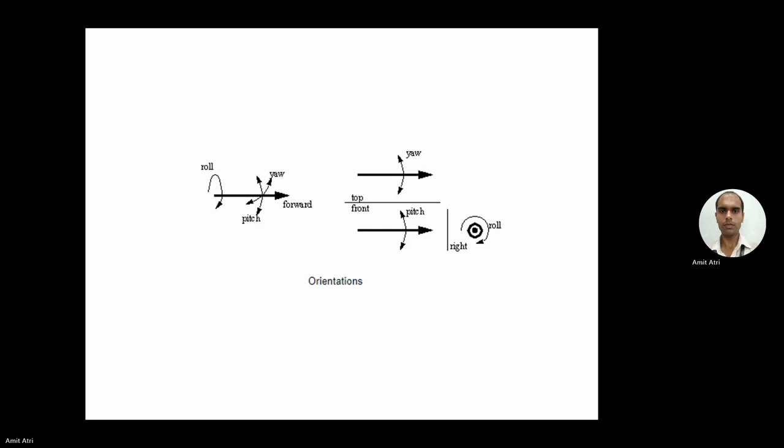Then, looking at the figure below, it will be obvious that the tool can be positioned at any orientation in space. Imagine sitting in a plane. If the plane rolls, you will turn upside down; the pitch changes for takeoff and landing; and when flying in a crosswind, the plane will yaw.

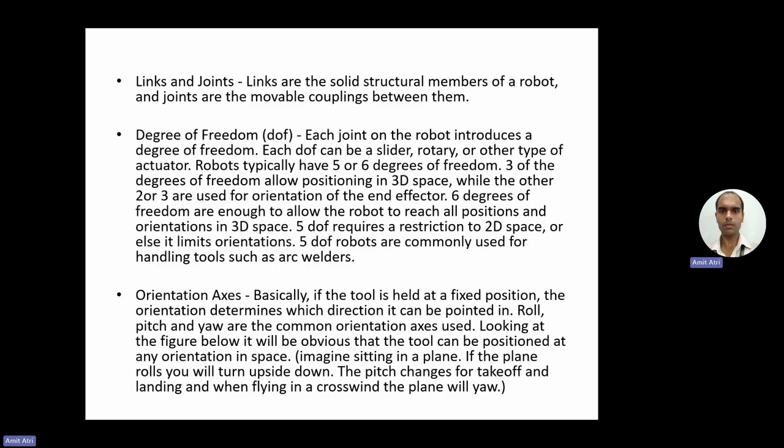Next is the position axis. Regardless of the orientation, the tool, or basically the end point of the robot, can be moved to a number of positions in space. Various robot geometries are suited to different work geometries. We will see the workspace in our coming slide.

Next is the tool center point. The tool center point is located either on the robot or the tool. Typically the tool center point is used when referring to the robot's position as well as the focal point of the tool. The tool center point could be the tip of a welding torch.

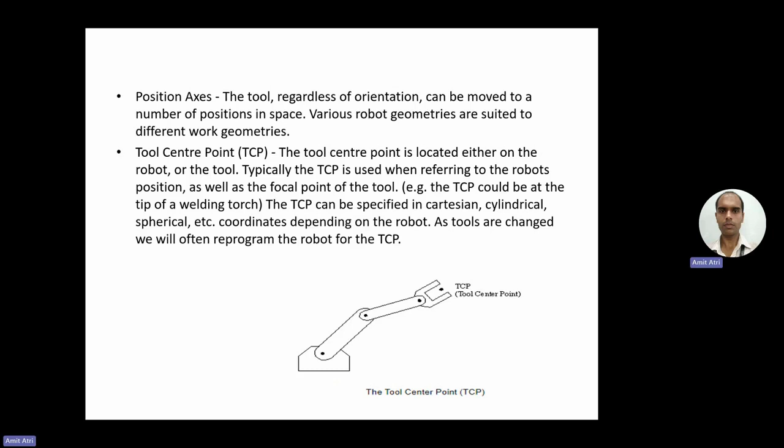The TCP can be specified in Cartesian, cylindrical, or spherical coordinates, the different types of coordinates. As tools are changed, we will often reprogram the robot for the tool center point. A different tool means a different tool center point, so we need to reprogram.

This diagram shows the workspace or envelope where the robot can perform some desired task. The robot tends to have a fixed and limited geometry. The work envelope is the boundary of positions in space that the robot can reach to work in.

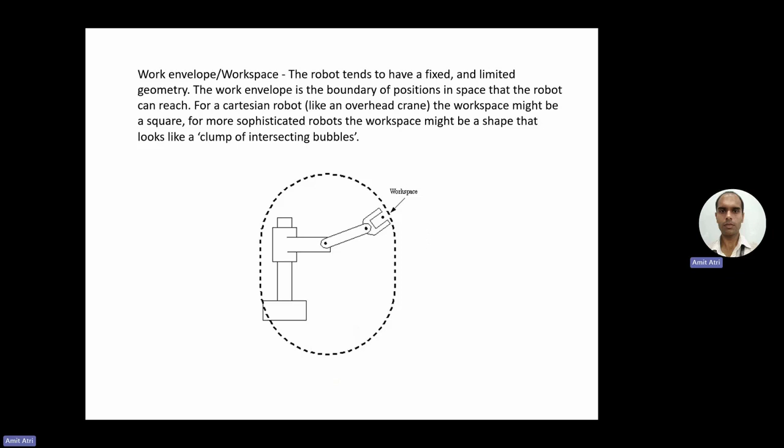For a Cartesian robot, like an overhead crane, the workspace might be a square, because up and down type movements are more common. And then in some rotation types, forming a square. For more sophisticated robots, the workspace might be a shape that looks like a clump of intersecting bubbles.

Speed. One of the major advantages of the robot is its high speed. Speed refers either to the maximum velocity achievable by the TCP or by the individual joints. This number is not accurate in most robots and will vary over the workspace as the geometry of the robot changes. The number will often reflect the maximum safest speed possible. Some robots allow the maximum rated speed to be passed, but it should be done with great care.

Okay, that means the speed we should monitor. Next is the payload. The payload indicates the maximum mass the robot can lift before either failure of the robot or dramatic loss of accuracy, meaning the loading capability of the robot. It is possible to exceed the maximum payload and still have the robot operate, but this is not usually practiced because the quality or the accuracy may be compromised.

When the robot is accelerating fast, the payload should be less than the maximum mass. So this is affected by the ability to firmly grip the part as well as the robot structure and the actuator. The end of arm tooling should be considered part of the payload.

Then settling time. During a movement, the robot moves fast, but as the robot approaches the final position, it slows down. This we also observe in the programming: between the endpoints the movement is fast, and near the endpoint the movement is slow. The settling time is the time required for the robot to be within a given distance from the final position.

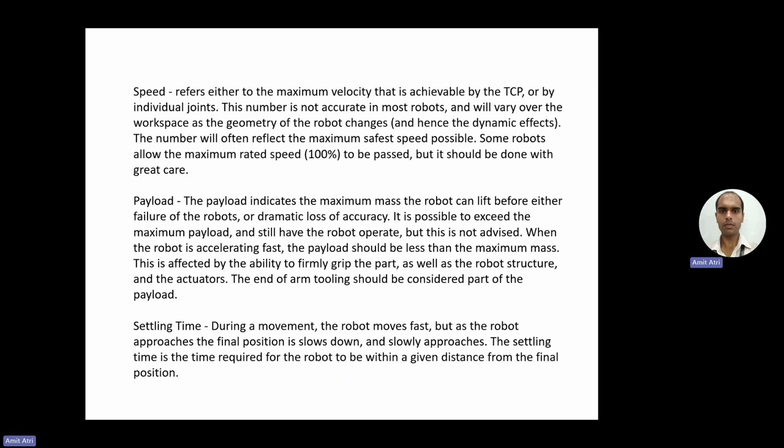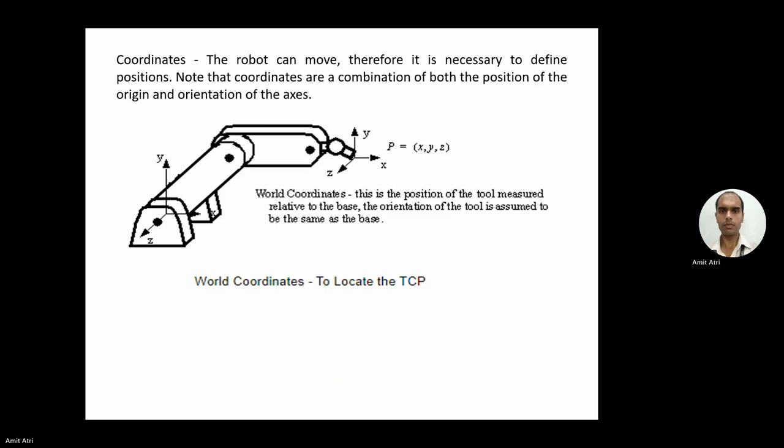Here the coordinates are shown X, Y, Z. Because the robot can move, it is necessary to define from which position it has to move to which position, the initial position and final position. So the coordinates of the joints are shown here in the XYZ domain. Tool coordinates, then joint coordinates, both are there. Tool coordinates consider orientation, and they are measured against the frame attached to the tool. Next is the joint coordinates: the position theta 1, theta 2, theta 3 means how much the joint is moving.

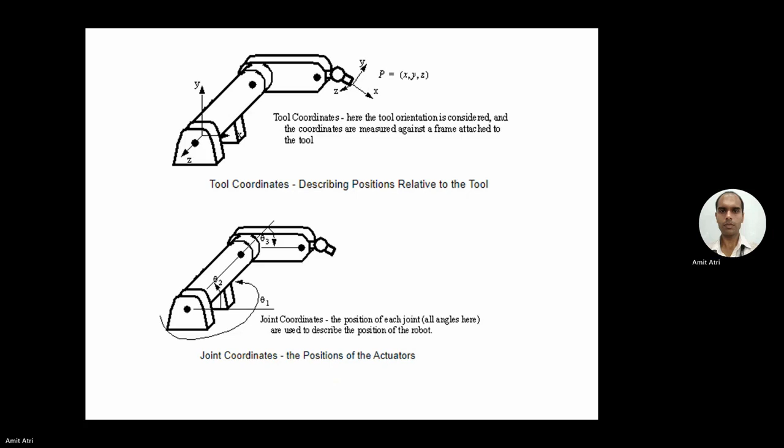So now coming to accuracy and repeatability. First, the resolution and the use of digital systems. Again, other factors mean that only a limited number of positions are available. Thus the input coordinates are often adjusted to the nearest discrete position, because there are limitations in determining the exact location and then assigning the location as a position to the robot.

Then kinematic modeling error. The kinematic model of the robot does not exactly match the robot. As a result, the calculations of required joint angles contain a small error. Next is calibration error. The position determined during calibration may be off slightly. It means the position which we have determined is not the exact position of the object or of the tool, so there is an error. That is a calibration error.

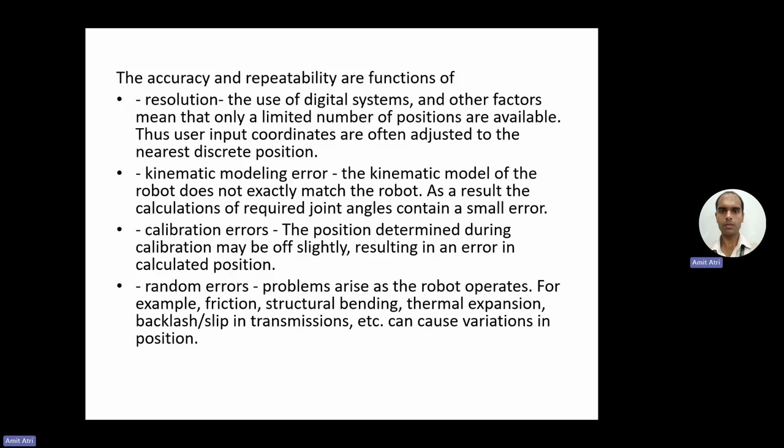Then random errors. They occur due to the operation of the robot. Some examples are friction, structural bending, thermal expansion, backlash. Then accuracy. Accuracy determines how close the robot gets to the desired point. This measures the distance between the specified position and the actual position of the robot end effector. Accuracy is more important when performing offline programming because absolute coordinates are used.

Next is repeatability. This is how close the robot comes to one position again. Once it has moved to a position, it has to come back to the same position. Repeatability means it will come back to the same position any number of times, otherwise there could be some deviation. It moved from point A to point B, then it is coming back to point A. If repeatability is high, it will come exactly to point A. If repeatability is low, it will not come exactly to point A; it will come near point A.

This will go on increasing because it has to perform the same task a number of times. So repeatability is a measure of the error or variability when repeatedly reaching for a single position. This is the result of random errors only. Repeatability is often smaller than accuracy.

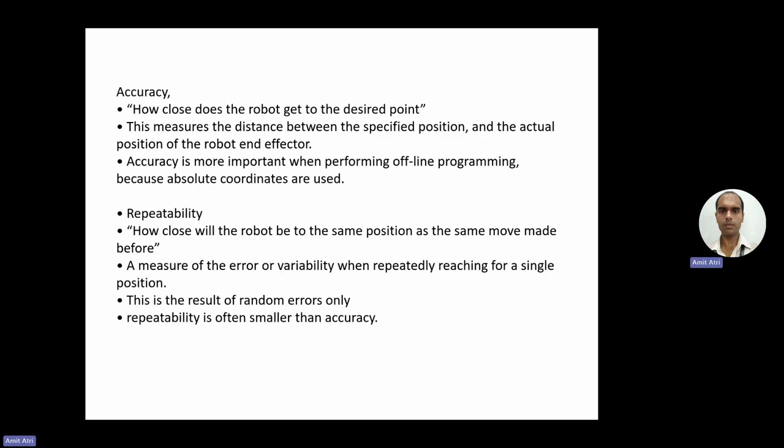Next is control resolution: spatial resolution and control resolution. Spatial resolution is the smallest increment of movement into which the robot can divide its work volume, the smallest increment in the work volume. It depends on the system control resolution and the robot's mechanical inaccuracy. It's easy to conceptualize these factors in terms of a robot with 1 degree of freedom.

Next is control resolution. It is determined by the robot's position control system and its feedback measurement system. The feedback system, in the basic system we studied, was using the sensor. So position control system and feedback system. It is the controller's ability to divide the total range of movement for a particular joint into individual increments that can be addressed in the controller.

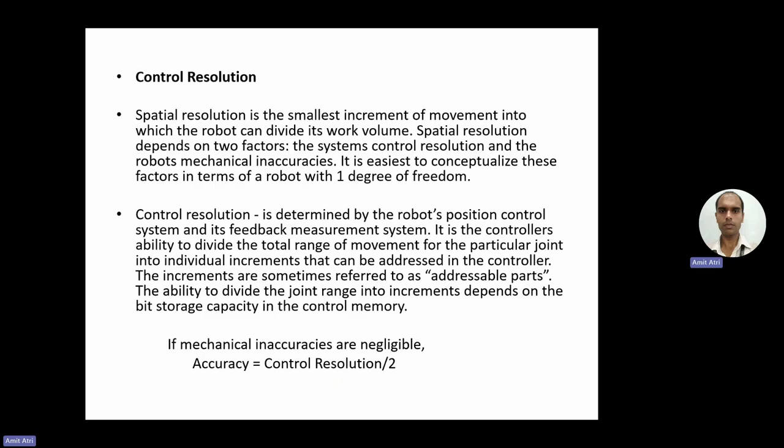The increments are sometimes referred to as addressable parts. The ability to divide the joint range into increments depends on the bit storage capacity in the control memory. If we neglect mechanical inaccuracies, then accuracy is equal to control resolution divided by 2, meaning half of the control resolution.